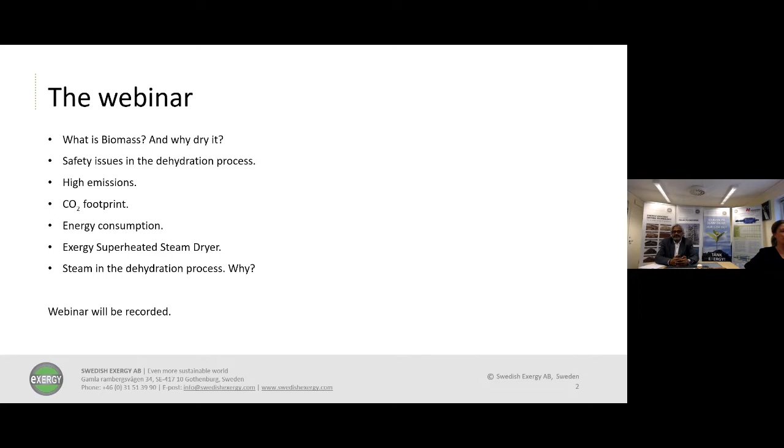Swedish Exergy is a company based in Gothenburg on the west coast of Sweden. The technology, what we call it today, Exergy PSSD. Exergy pressurized superheated steam drying was invented at the Chalmers Technical University by Claes Münter, the founder of this company, who started the business in 1979.

Also, the first dryer was built almost the same year when the company started and research was still ongoing. That dryer was for drying paper pulp, still operable today after nearly 40 years of running. We are a full service company to provide from the concept to a completely commissioned plant and beyond, which means we also provide after sales service.

In the circle, you see our focus areas for our business applications. We start with biomass, today's topic. We also work with animal feed, ethanol for both first generation and second generation in different parts of the production process. Pulp and paper. Production of market pulp is one of the big applications that we work with.

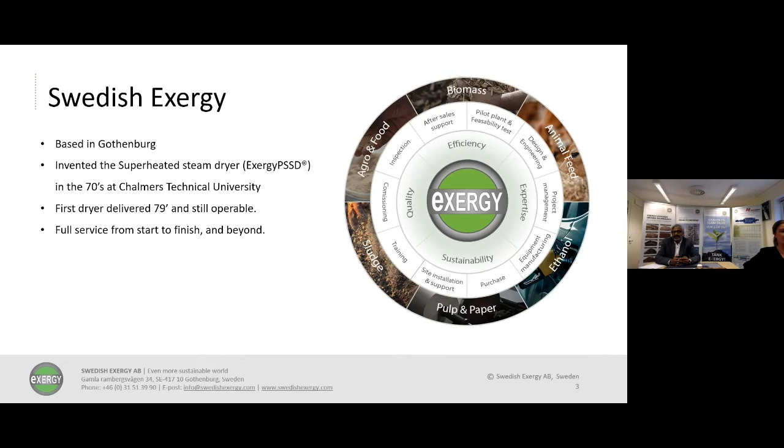What is biomass? There is a lot of debate going on currently around the world and in all of the countries concerning climate change and the effects of the emissions that we are making from fossil fuels. How can we mitigate it? Biomass is one source that can help mitigate CO2 emissions, or carbon emissions, in the long term, looking at a perspective of between 10 to 50 years.

Sweden is a leading country when it comes to biomass utilization for energy production, both in terms of heat especially, and power as well. Of course, we make a lot of products from biomass in this country, from the wood, from paper pulp to making products for house making, all kinds of things. And we are also able to produce a lot of biomass for energy production. Almost 40% of the energy requirement of Sweden comes from biomass, which is a very big chunk of energy that is produced from biomass.

So it is sustainable. There is no question about biomass not being sustainable. There's a debate going on that biomass must be kept in the forest, not used for energy or for production, because it absorbs CO2 and reduces the CO2 effect. Yes, that's correct, but that's only short-term thinking. If you think long-term and make it sustainable in terms of planting new biomass or new trees and harvesting the old ones, you make a cycle.

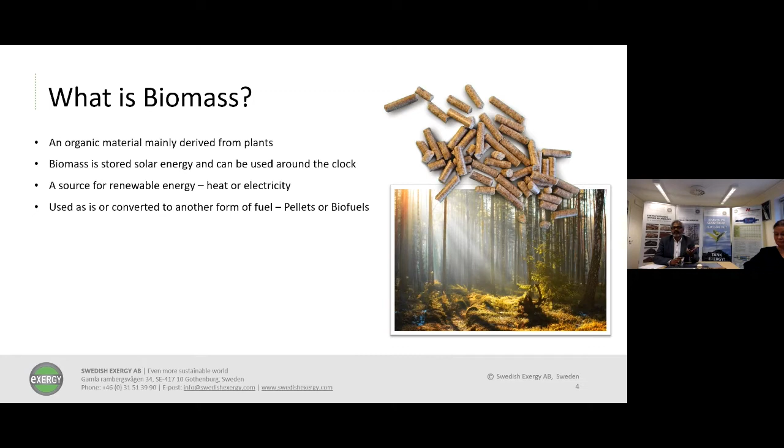Biomass can come from any kind of plant. It could be trees, it could be other things. And it is sustainable, as I said before. So we are focusing on that. The common feedstocks that are being used for energy production are wood processing residues, which could be coming from manufacturing, from sawmills, from other areas.

Forestry residues: when you harvest the plant, there are a lot of parts of the plant that are not going to paper pulp making or wood making. The leftover can be used as biomass for energy production. Energy crops, and other plants that are being used mainly for energy production. Agricultural residues could be from wheat straw, rice straw, rice husk; all kinds of biomass can be used for making energy.

And waste from industries, farms and households. This is also a good biomass provided it is processed further. Sludge, for example, coming from water treatment plants is a biomass, and energy produced from the sludge is classified as green. It is making the system circular as well, and is making the environment safer by reducing streams like heavy metals going into the water or into the food chain, through the fish or through the meat or through the milk, whatever we are producing from that.

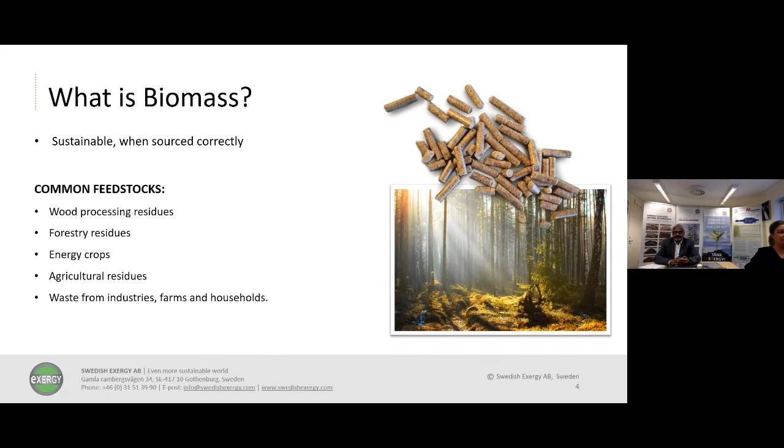Why dry biomass? If you talk to a boiler company and ask them to produce a boiler for you, you can get an answer that they can burn 60%, 70% moisture content feedstock in the boiler. Correct. You can feed 60% or 65% moisture content to the boiler, but water does not burn. This is a fact. You cannot burn water. You have to evaporate the water, remove the water from the biomass before you can burn it.

So one reason to dry is to increase the overall combustion efficiency of the boiler. So you can produce more energy from the same amount of biomass, because you don't have to use the energy in the boiler to dry it.

Of course, drying needs energy, but that can be done very, very effectively using Exergy PSSD, for example, that is one technology with a very low amount of energy. And of course, the water vapors we talked about in the furnace, and also when you burn wet, your emissions are much higher from the boiler. It's a fact, and you can reduce that by burning more dry wood.

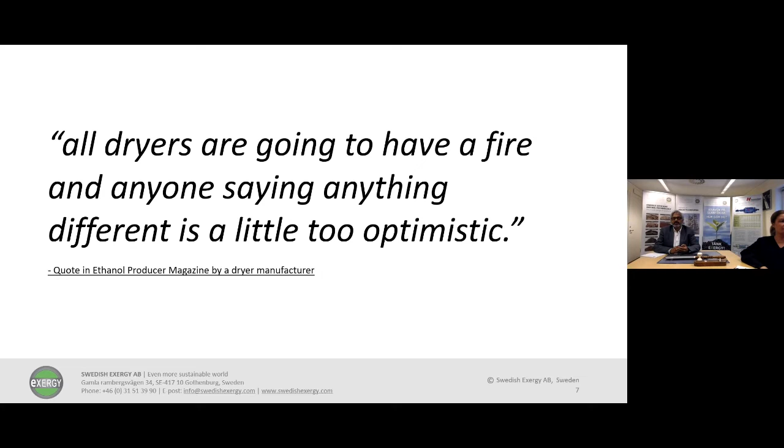And it is absolutely correct for all dryers that operate with air, that operate with high temperature flue gases. Those are the most common dryer technologies in the market, and they do catch fire, they do explode, they do create a lot of problems. So this statement is correct for that, but we will come to how we can eliminate it completely and make this statement the other way around, that Exergy PSSD does not burn and does not explode.

Here we can see the same magazine had made a study and made this table diagram to show the economical effect of the losses related to the drying process. And related to that is the off-gas treatment process in the States, where you have to have an RTO, regenerative thermal oxidizer, where you must treat the off-gases to remove or destroy the VOCs from the drying process. So you can see those two that are related to the dryer or drying process are the most cost-causing

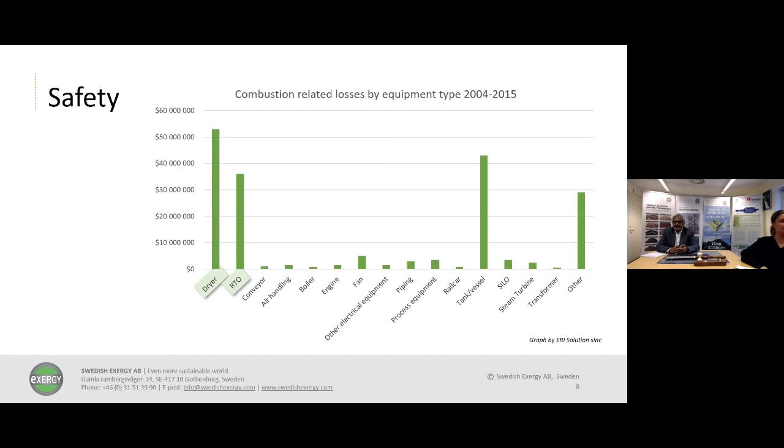The emissions from the dehydration process, this is related to the existing ones on the market, based on air or based on flue gas, which are working directly with the drying material, let's say biomass being dried. Particulate emissions are of course there. You have VOCs coming out because they're being extracted and emitted to the atmosphere. From the combustion systems also comes out NOx.

We have CO2 emissions from the energy production process for drying, and with all open dryers, which are using air or flue gas, you always have emission coming out from the dryer, and moist air, especially during the winter time, is visible like a plume that you see from a distance.

And in high temperature dryers with flue gas, you can also see blue haze in some periods, which is of course not good for the atmosphere and also not good for the people living around the system. There are a lot of protests from people who see this kind of emission from the drying process, which is perceived as not healthy.

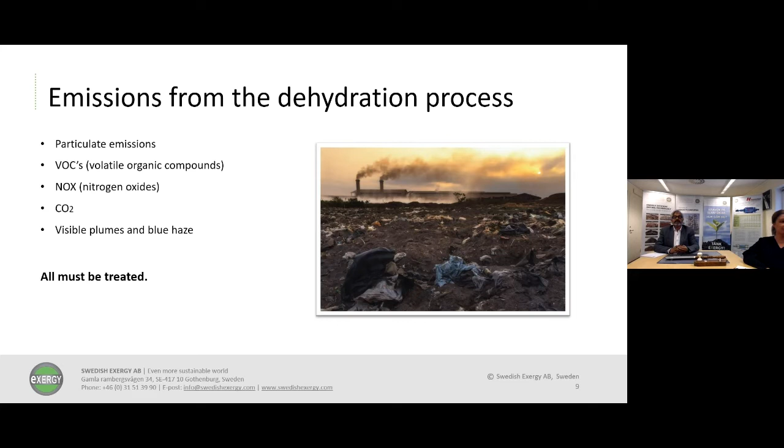Then in terms of energy consumption, this is a very simple presentation of 3 different technologies, common ones in the market, 2 of them, belt dryers and drum dryers, and our Exergy PSSD. So if you look at electricity consumption, it's more of the same for us and for other technologies in the market.

But when it comes to the heat consumption, then it is only 0.15 megawatt hour per ton evaporated water, wherein we can recover 90% of the energy that goes into drying as low pressure steam, as compared to up to 1 megawatt hour per ton of evaporation for the normal dryer. So we're talking about energy consumption close to 15% of what other technologies are needing.

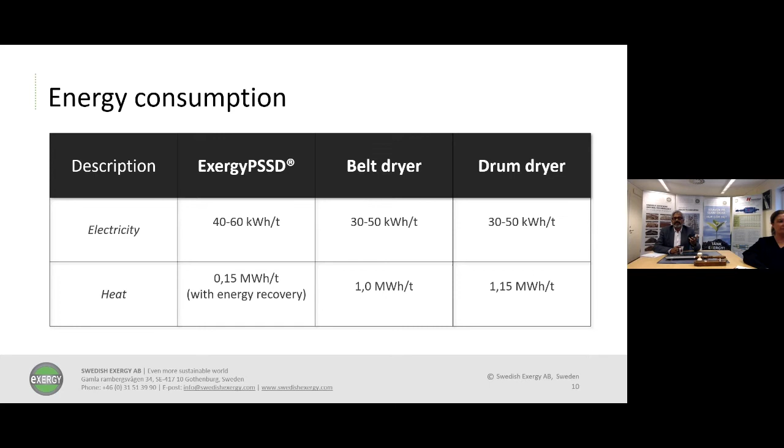And also with our technology, we can make your drying process completely free from heat uses. We can use 125 to 150 kilowatt of electricity to run the entire dryer instead of using any type of thermal energy.

So why Exergy PSSD? Why is our technology a preferred technology, or should be the preferred technology for dehydration of biomass? One, we just looked at the energy consumption, which is very, very low. Recovery of energy as pressurized steam, of course, it's a high value energy that can be used for process heating if we are integrated to a process, for example, in an ethanol plant or in another plant.

It can be also used for district heating in the colder countries. It can be used for power production, the areas where we can make power from the steam. And with power prices, energy prices increasing like anything at the moment, and it's likely to continue to be at a high level, production of electricity from the dry steam is a viable option.

And of course, low consumption of energy is very, very important for your total production cost. To increase your margins on your production, it is harder to increase the price of pellet than to try to reduce the production cost and increase your margins.

No emissions to atmosphere, because our Exergy PSSD is 100% closed, so there is no emission coming out to atmosphere. So we have no particulate emission, no VOC emission coming out to the atmosphere. And of course, no smell either.

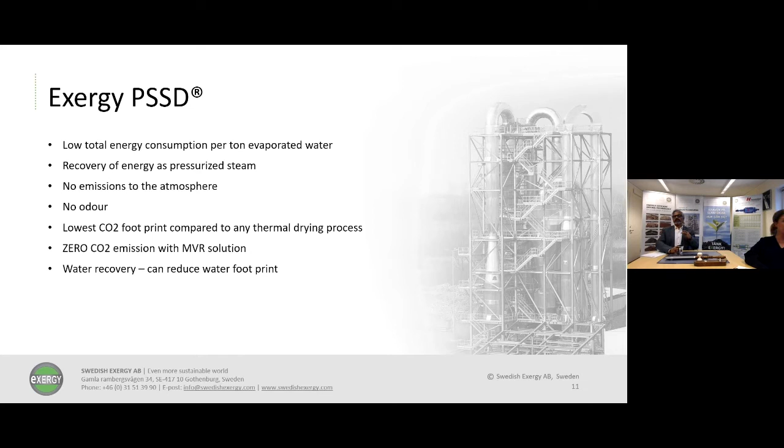And water is a scarce resource in many, many countries. It's getting even more important to conserve and preserve water. So if you're building a factory and you have a demand from authorities to have a low water footprint, with our process you can recover all the moisture that is in your product as liquid water, and recycle it back in the process. So you can reduce the water footprint as well, as a benefit.

Then the process itself doesn't have a lot of moving parts. It's a fan and two feeding and discharge equipment. So basically 3 rotating machines in the entire plant, which means we have very low maintenance cost.

We have a drying time of about 10 to 15 seconds, as compared to a few minutes in any of the comparable dryers, like a drum dryer could be a few minutes. On the belt, it could be up to 1 hour. But the product lies there and moves slowly forward while it's being pumped with hot air from the bottom, trying to remove the moisture. So you have tons and tons of material inside. It takes a very long time to dry. We do it in a very, very short time, 10 to 15 seconds.

And with that, we also can maintain the moisture content of the product within a very, very precise level, because we expose every particle to the same drying condition, which means they are being suspended or dispersed in the dryer before drying them.

Whereas in a belt dryer, for example, you have a layer of material lying where the bottom part gets super dry, the top part still remains wet, because the air as it passes through the bed gets more and more saturated. By the end of the belt, it is nearly saturated. So it's not drying anything on the top, but it's drying a lot at the bottom. So you get very unevenly dried product.

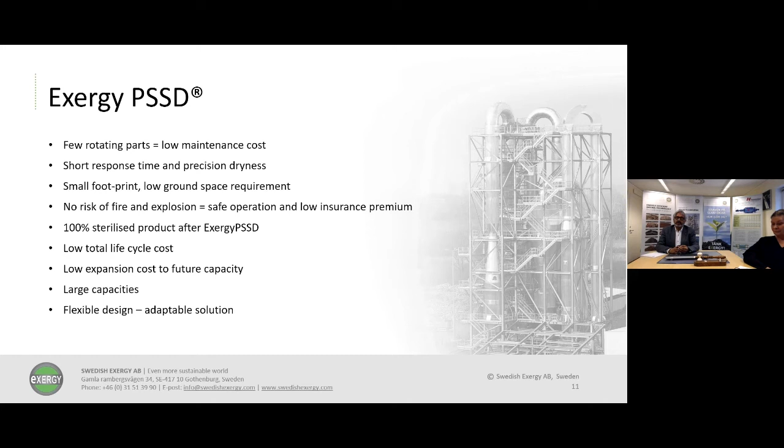Whereas if you look at a comparative technology like a belt dryer, there is a fixed feeding point, fixed discharge point. You cannot do much about it. Similarly, the drum dryer is the same. It's a fixed feeding point, fixed discharge point, whereas we can adjust the feeding and discharge height-wise and even XY coordinates, site-wise. So we can adapt to your plant design, which means you can save conveyors. You can also save other costs related to the layout and additional machinery.

Steam. Why steam? Because air and flue gases work. So why do we need to think differently, out of the box, and use steam for the drying process? Of course, we have learned in the previous slide about why you should use it, what the major benefits are. These are additional benefits that you get on the product, which we call product quality improvements, and process improvements.

One important aspect, if you're a pellet producer, is steam conditioning. Traditionally, when traditional dryers are used, the pellet presses have a conditioner or conditioning unit before them, where they put some water or some steam to condition the biomass before it goes to the presses. The idea is to soften the product and to make the moisture as even as possible when pressed into pellets, to keep good durability and a good finish on them.

We are conditioning the product with steam in the dryers. We do not need steam conditioning or a conditioning section before the pellet presses, so we can feed biomass directly from the dryer to the presses. The quality of the pellet also improves.

You have less breakage, and during transportation, loading and unloading, the amount of dust that is produced is reduced compared to normally produced pellets. This could be a big benefit, and the losses can be reduced. If it turns into powder, it's harder to handle, and it's also lost for the process. We talked already about precision uniform drying.

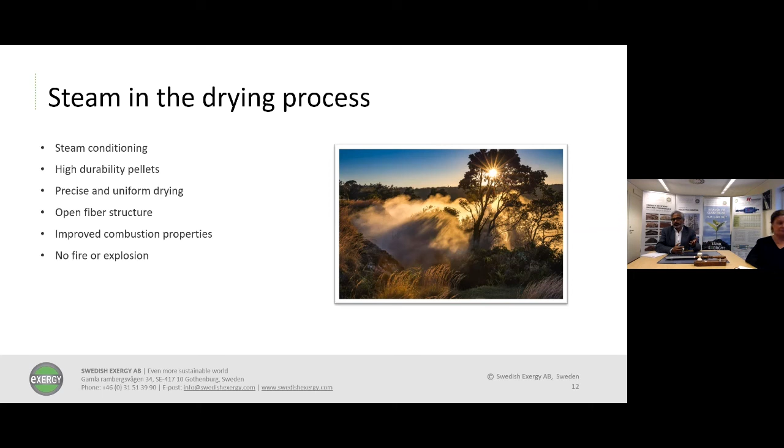A brief comparison of the conventional systems like belt and drum dryers, the most common ones in the biomass industry, to our Exergy PSSD. On the capex, of course, we have the dryer. They also need a dryer, but other than the dryer, you need flue gas treatment processes like RTO and filters to get rid of all the particulate emissions, VOCs, odor problems and other things by adding this equipment at the end of the drying process, which we do not need. That's eliminated. We need only Exergy PSSD. It is the only equipment needed.

Then you also have to install firefighting and explosion equipment because you need to ensure that a fire or explosion doesn't spread and the damage is minimized. So you need a lot of fire detection equipment, fire quenching equipment, water systems, which have to be installed in order to even get insurance from the insurance company. If you don't do it, you will not even get insurance. So this is the equipment needed to complete the drying or dehydration process, whereas with Exergy PSSD we're complete with just one piece of equipment, the dryer.

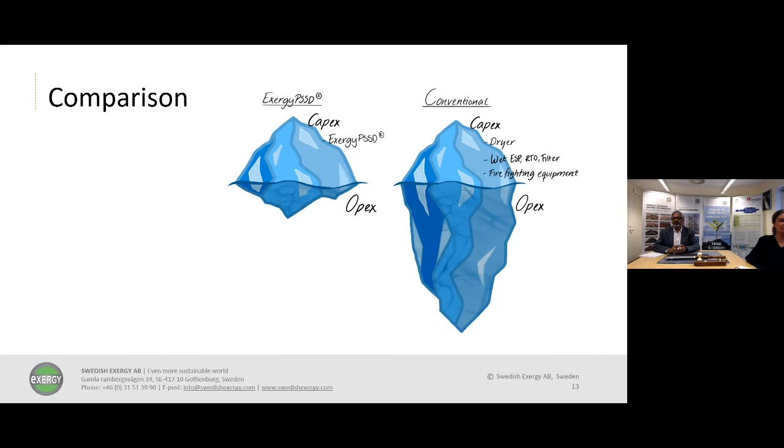Water recovery could be very important. The water footprint could be absolutely reduced when you can recover all the water from the biomass, which is an important aspect as well, which you cannot do with the other technologies. It all ends up in the air and becomes vapor in the atmosphere.

Yeah, if we have any questions from the previous or other parts, we are of course open for discussion at the moment. So feel free to send in your questions in the little box that you can see, and we will answer them. I can see that we got a question here. It says, does this technology have a broad spectrum of different possible final product dryness?

Yes, it does. We can maintain dryness from whatever you need on the lower end to almost non-measurable moisture content in the final biomass. So we can go up to 99.5% dryness if it is required for other processes that demand that. In one case, we built a plant where the moisture is not measurable. So yes, we can control the moisture in a wide range. It's not a problem.